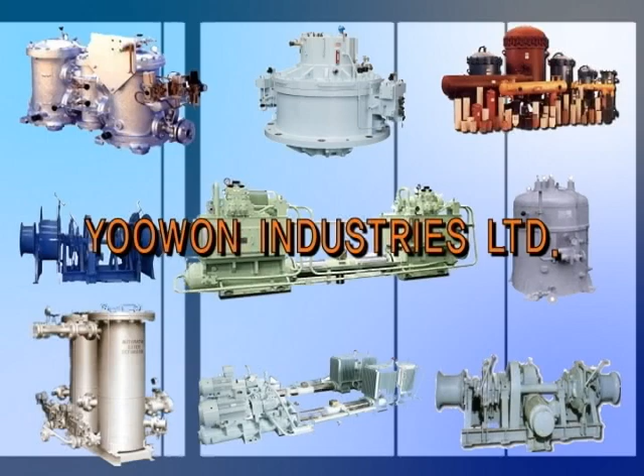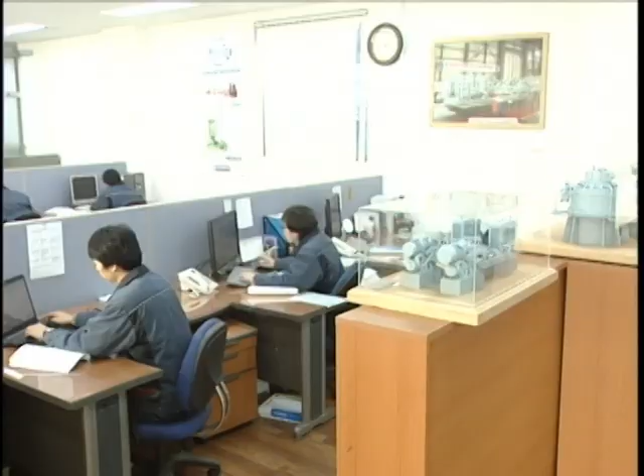Founded in February 1977 as a hydraulic steering gear and hydraulics machineries manufacturer, Yoowon was designated as a qualified company by the Korean Ministry of National Defense in 1983, being indebted to the endless passion of its employees.

Since entering into a technical license agreement with Hyde Marine Incorporated of the United States in 1985 for manufacturing IAC naval steering gears and deck equipment, Yoowon has supplied parts for numerous vessels for the Korean Navy and Coast Guard, and has also exported its products overseas.

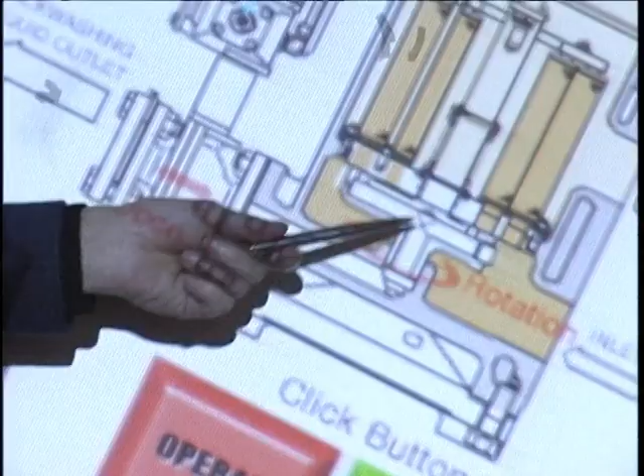Yoowon became the leader of Korea's shipbuilding equipment industry in 1993 based on its continuous growth efforts, and entered into a technical license agreement with Mitsubishi Heavy Industries Limited for the production of large electric hydraulic steering gears.

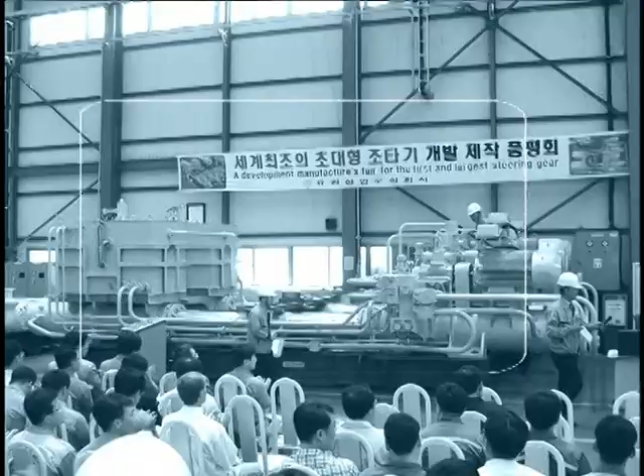In 1994, Yoowon began manufacturing automatic backwash oil filters for diesel engines and turbines. In 2001, it began production of the world's first large steering gears with maximum torque of 1,021 ton-meter. Four ship sets of steering gear were shipped in the same year after being presented to ship owners and shipbuilding companies.

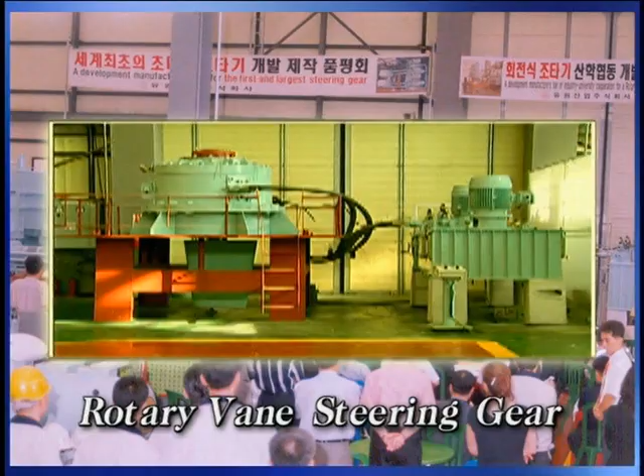Following the development of ultra-large steering gears, Yoowon captured the industrial spotlight by developing Korea's first rotary vane steering gears for small and medium-sized ships using its own technology.

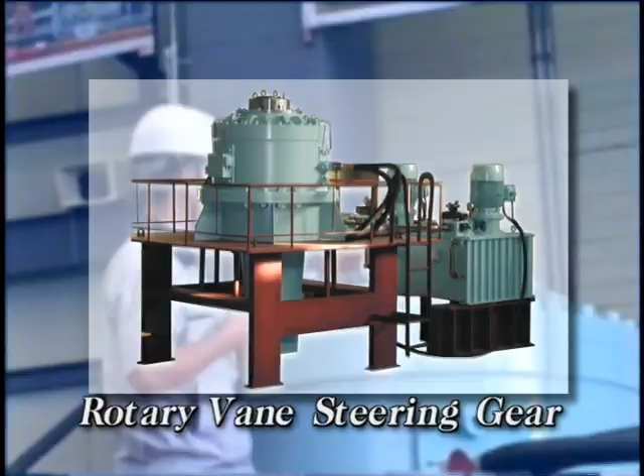In 2003, Yoowon steering gears were designated as a world-class product by the Ministry of Commerce, Industry and Energy. Yoowon was awarded this honor again in 2010 for its auto filters.

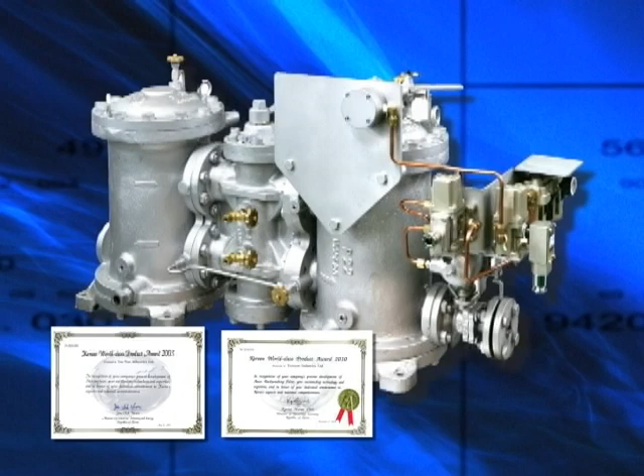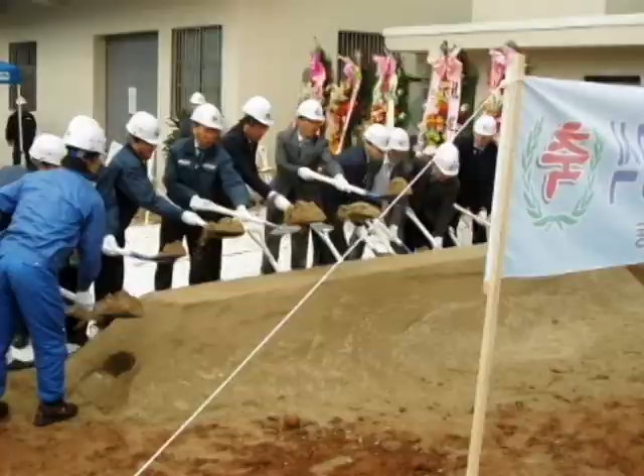In 2010, Yoowon completed its third manufacturing plant to meet its customers' needs and to achieve its vision for the future.

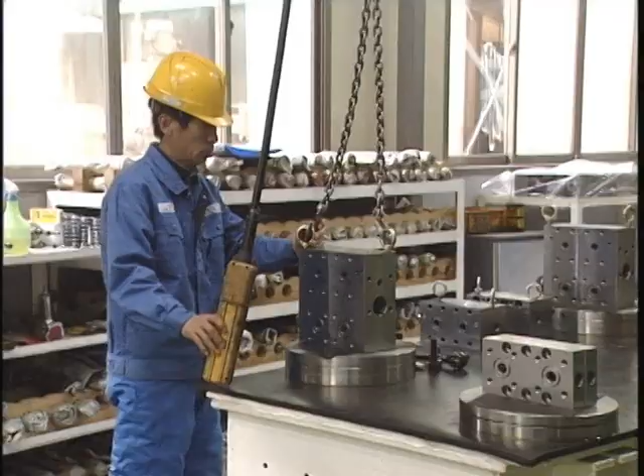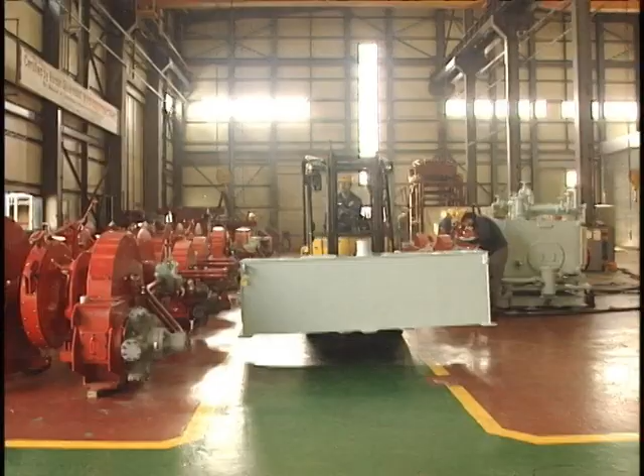Today, Yoowon is ready to make technological advancements with dedicated craftsmanship in collaboration with its business partners in an effort to manufacture world-leading products, as it leads the development of new technologies and manufactures the highest quality products for customer satisfaction.

Under a firm belief that the efficient management of our environment is the key to greater competitive strength and the improvement of our quality of life, Yoowon is making dedicated efforts to be an eco-friendly company.

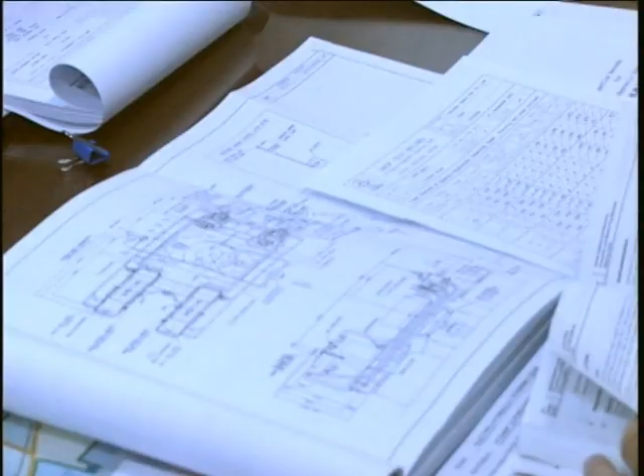Yoowon values principles, adheres to the fundamentals, and always leads changes with its creativity and spirit of challenge. Yoowon Industries is growing into a global leader of the shipbuilding equipment industry with its advanced technologies, and will rise to greater heights as a company that drives Korea's key industries.

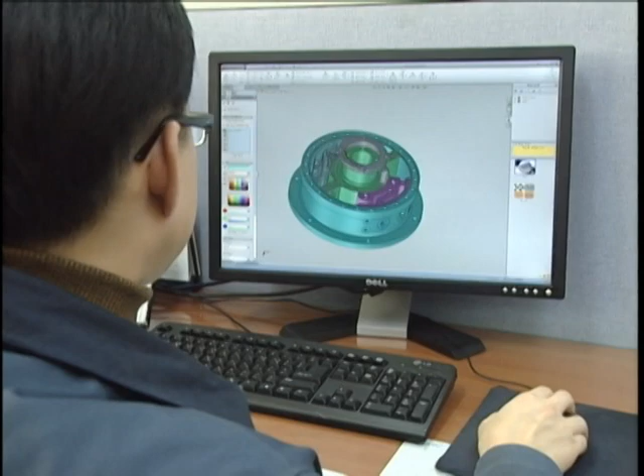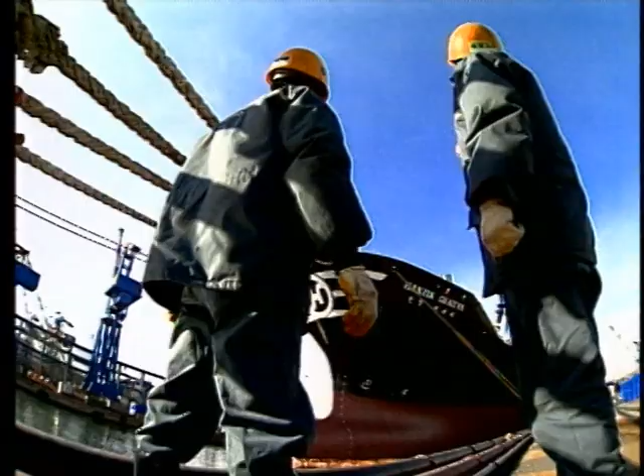Based on the technology and engineering experience accumulated over its 30-year history, Yoowon has been supplying high-quality steering gears, filters, and various deck equipment to Korea's major shipyards, including Hyundai Heavy Industries, Daewoo Shipbuilding and Marine Engineering, Samsung Heavy Industries, Hyundai Samho Heavy Industries, and Hanjin Heavy Industries, as well as Korea's small shipyards and rapidly growing overseas markets such as China.

Since developing steering gears and deck equipment for Korean Navy and Coast Guard vessels in 1997, Yoowon has been continuing its efforts to develop world-leading technologies.

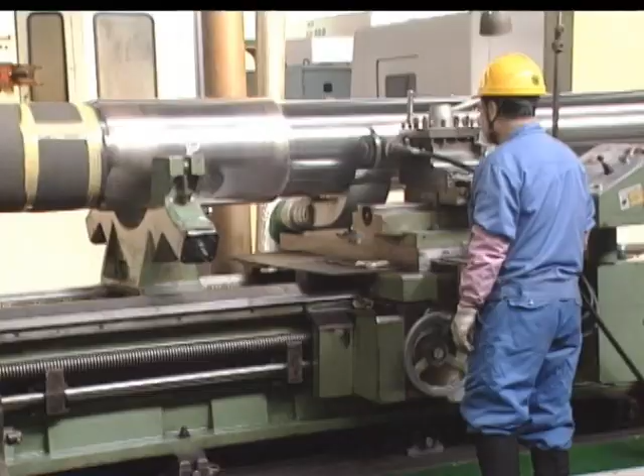Since entering into a technical license agreement with Mitsubishi Heavy Industries for the production of Rapson slide steering gears in 1993, it has been supplying its products for container carriers, oil tankers, bulk carriers, LNG carriers, and other vessels built in major shipyards in Korea and overseas.

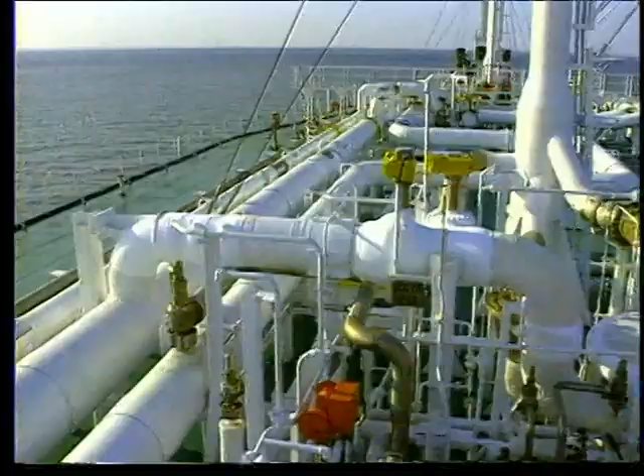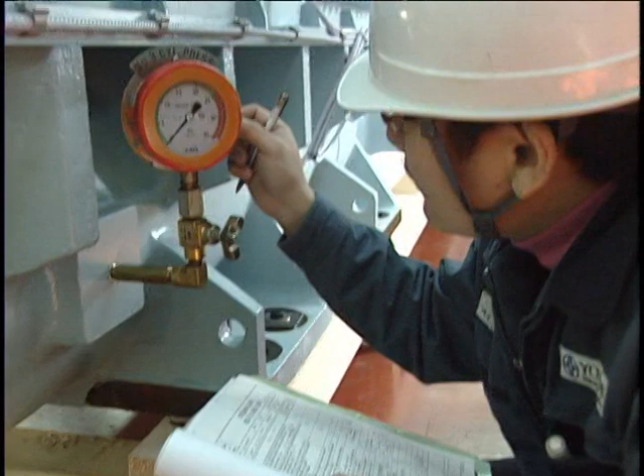Yoowon was successful in maintaining the cleanliness of hydraulic oil in LNG carrier steering gears under NAS Grade 7 in an assembled state using an eco-friendly, semi-permanent system. In 2007 alone, it supplied steering gears for 260,000 CBM LNG carriers.

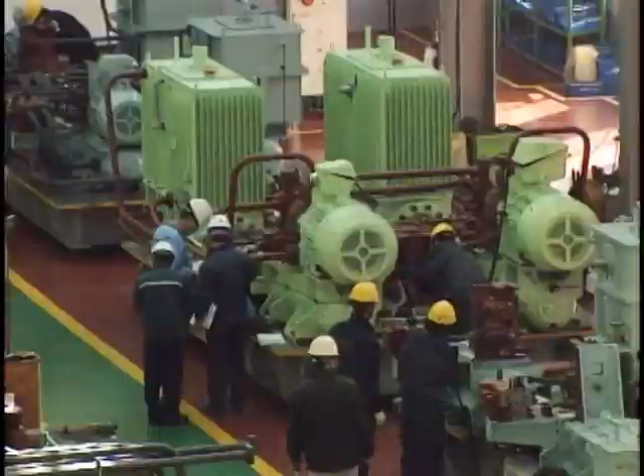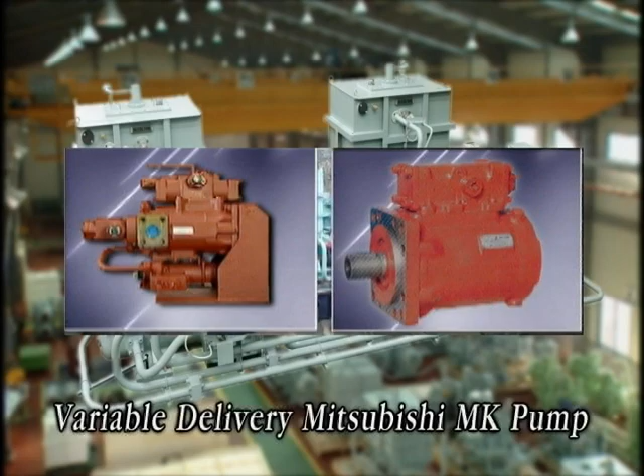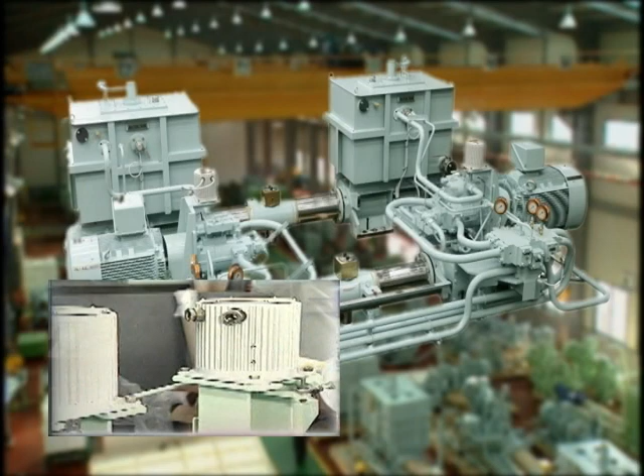The Rapson Slide steering gears utilize Mitsubishi's variable volume displacement MK pump, controlled by a torque motor linked to the servo controller, and oilless bearings for the ram pin bush so that no lubrication is necessary. It is equipped with a double hydraulic system with torque motor fail warning function against hydraulic locking, and an additional 3 to 4 hydraulic pumps are installed to be switchable into double output mode.

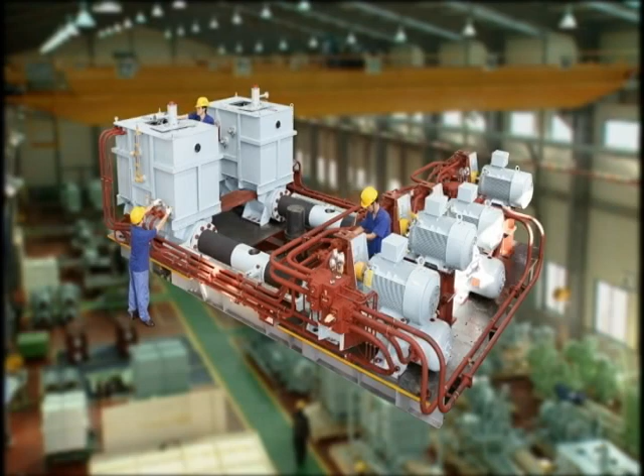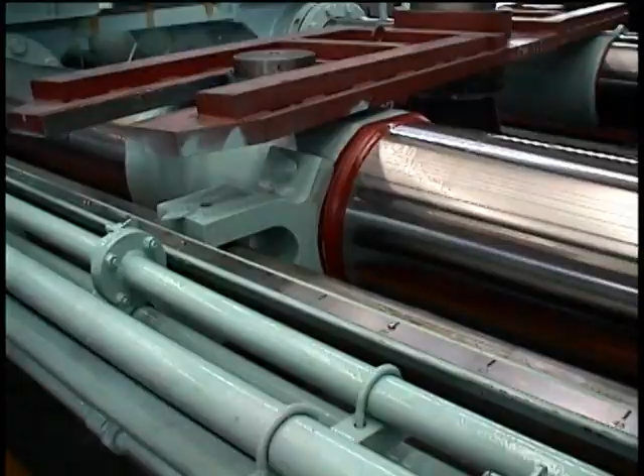The steering gears are manufactured to meet the specifications of every major classification society. Each product is tested in the shop in the presence of inspectors from major classification societies and ship owners, and only the approved products are delivered.

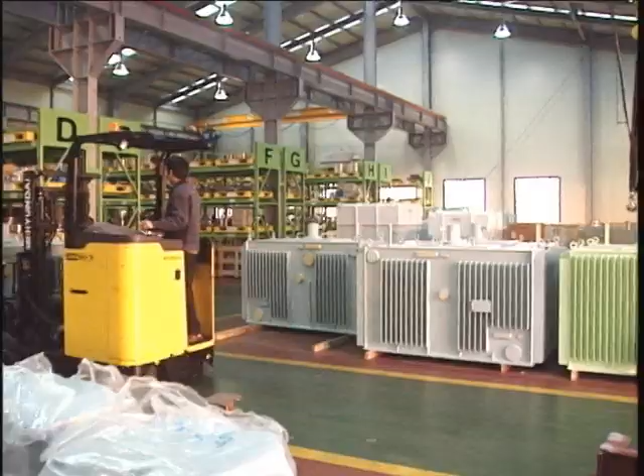Yoowon sales have grown steadily since the company made and entered into its first technical license agreement with MHI in 1993, and the total number of delivered products has exceeded 1,000 ship sets. By setting the record for the highest steering gear sales in 2009, Yoowon has proved itself as one of the world-leading steering gear manufacturers.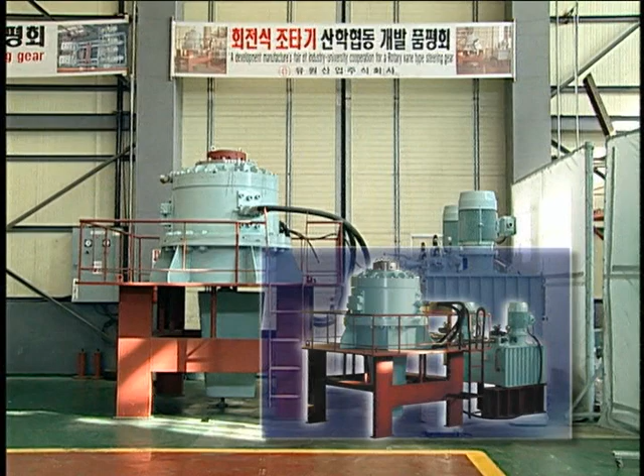Based on the technology acquired from developing piston type and Rapson slide steering gears, in 2002, Yoowon developed rotary vane steering gears using its own technologies. Yoowon rotary vane steering gears are preferred by small and medium-sized shipyards, and they received outstanding evaluations from ship owners and classification societies around the world.

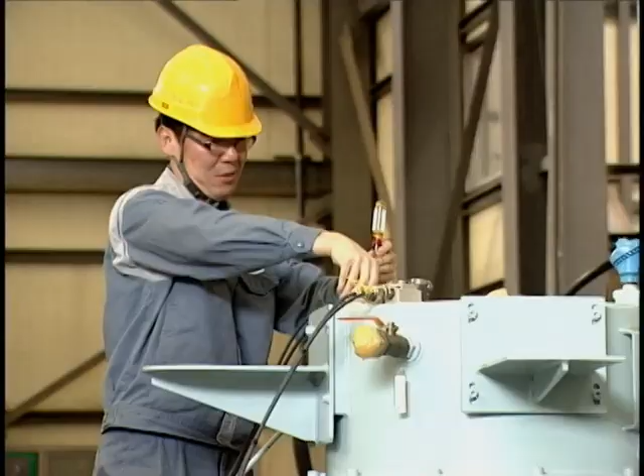The delivery of rotary vane steering gears to Korean shipyards began in 2006. Today, Yoowon has a record of delivery of hundreds of units to numerous shipyards in Korea and overseas.

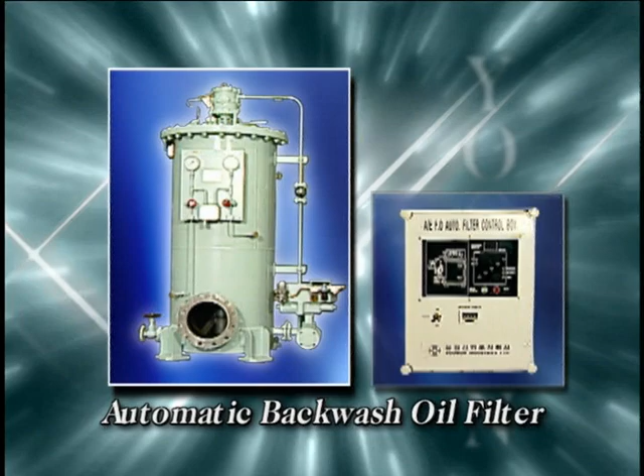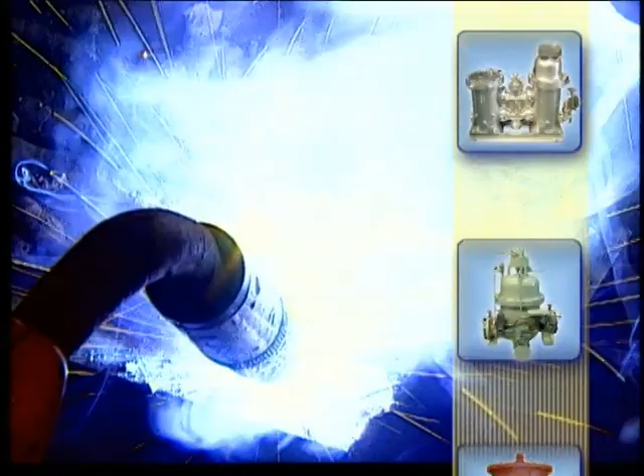Yoowon began production of automatic backwash oil filters and general multi-purpose filters in 1984 to filter fuel and lubrication oil for the engine and turbine. Ranging from shipyards in Korea and overseas to onshore power plants, Yoowon is supplying high-quality semi-permanent filters to be used by engine makers and nuclear power plants.

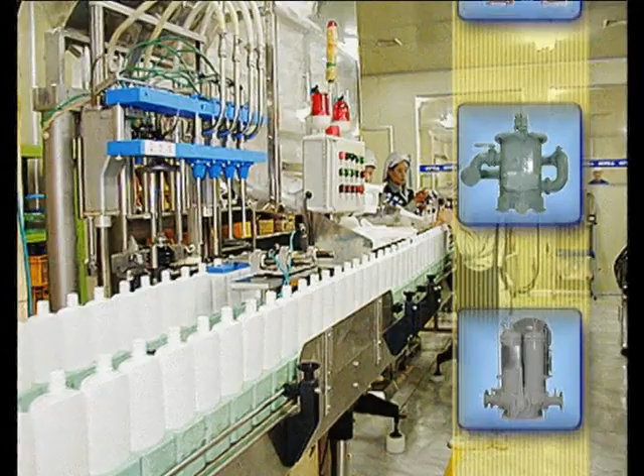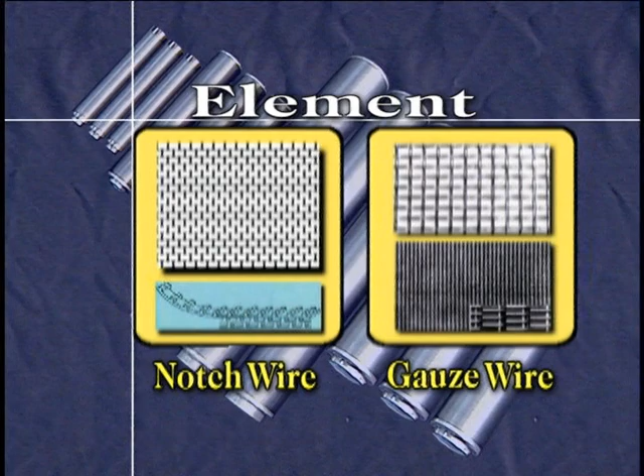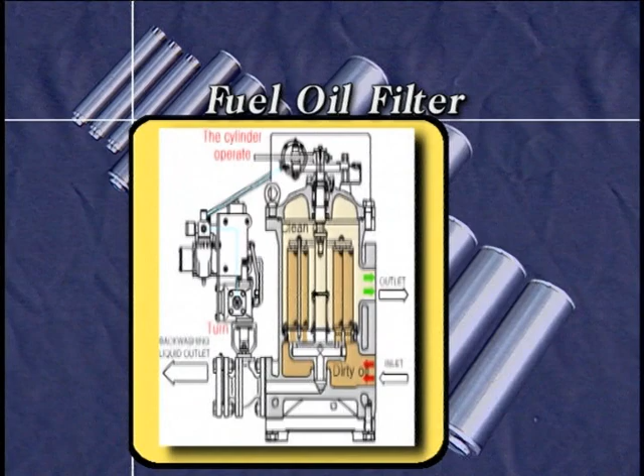These filters can be produced to have a filtration efficiency up to 10 microns while maintaining a greater durability compared to gauze wire elements. The filters also have controls with timer settings for automatic backwashing and utilize a system that automatically cleans impurities such as sludge on the element surface using the hydraulic pressure difference within the filter. This means that filters can have semi-permanent lifespans with regular maintenance.

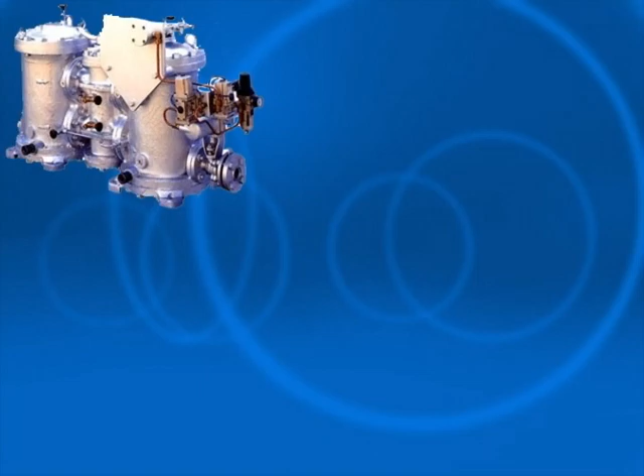The filters separate water and solid impurities in oil, diesel, gasoline, liquid natural gas, and jet fuel. Yoowon filters are supplied to oil refineries, oil tanks, machinery loading equipment, and jet fueling facilities in airports and Air Force bases. Yoowon also signed a filter supply contract for Samsung Heavy Industries' ballast system in 2010.

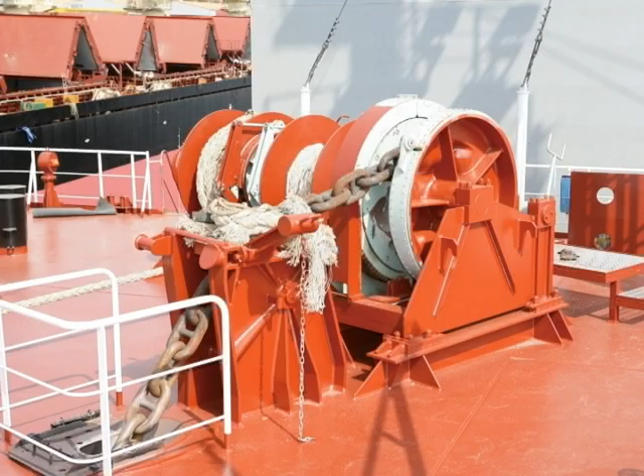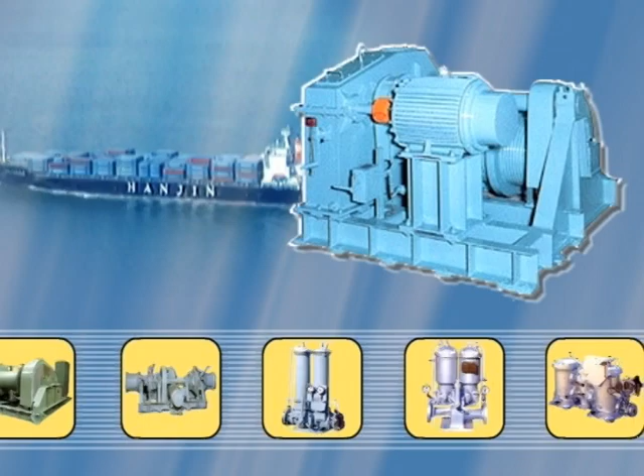As shipbuilding technology develops, Yoowon is working to improve ease of repair, user convenience, and economic efficiency of various equipment such as windlasses, mooring winches, capstans, towing winches, and special winches. And it is continuing its R&D to develop outstanding products such as offshore cranes, floating docks, and winches for nets and booms.

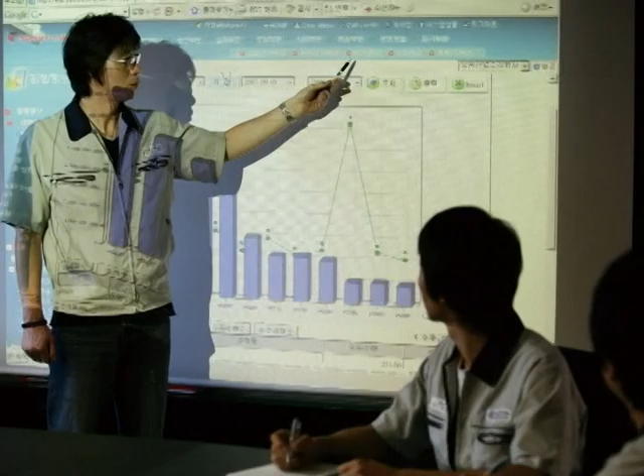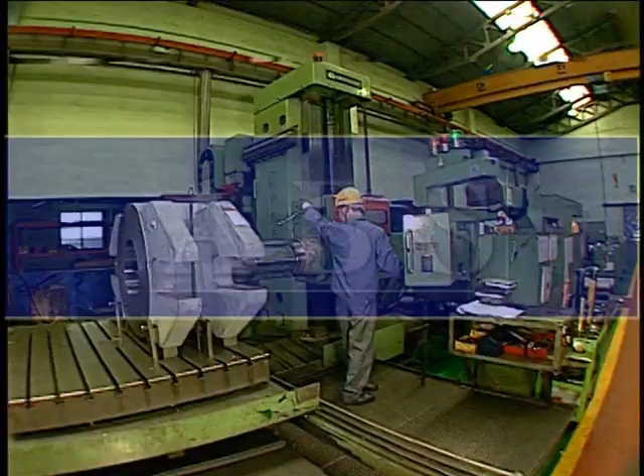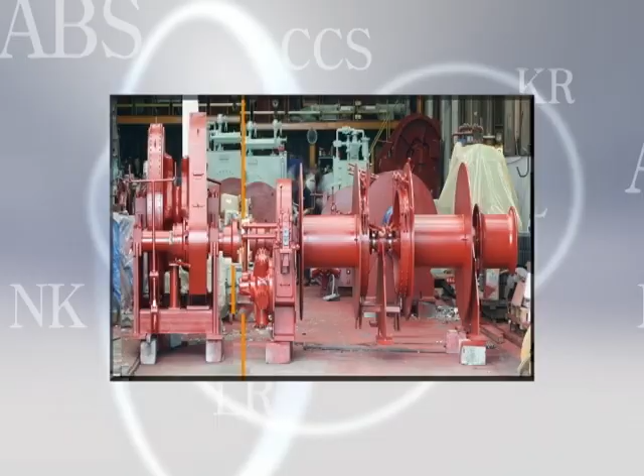Every Yoowon product is manufactured to meet specifications of every ship classification society, including ABS, DNV, LR, GL, BV, NK, CCS, and KR, plus other international regulations. Yoowon has outstanding engineers with abundant experience, ultra-high precision machinery, and advanced equipment. Yoowon is able to produce high-quality products and infinite development capabilities.

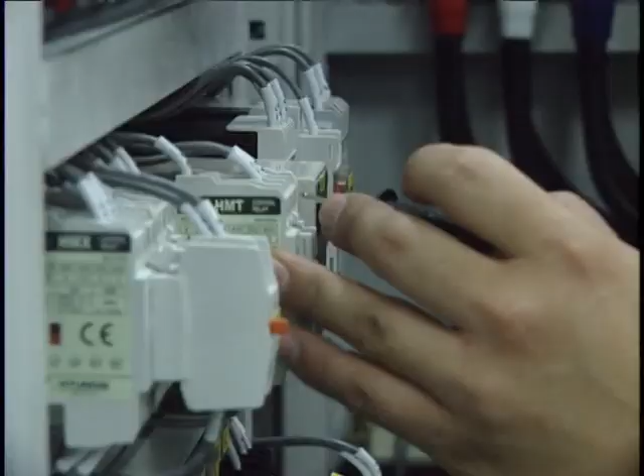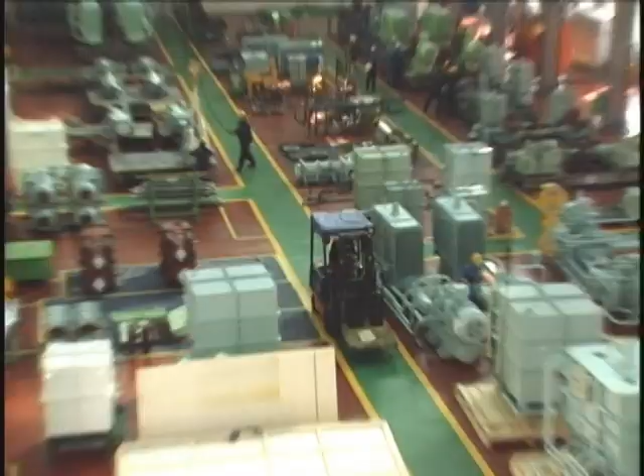Furthermore, Yoowon is developing the control units required for its products by using its own technologies, which is why Yoowon is recognized as a supplier of high-quality products built by using advanced technologies. Yoowon has acquired ISO 9001 and 14001 certificates from ABS, and it is operating a worldwide network of 20 offices in 16 countries to provide convenient after-sales service and information regarding all its products.

A company that creates a harmony of safety and growth. Yoowon Industries Limited. To earn its customers' trust by putting customer satisfaction first in the time of infinite competition, Yoowon will focus its efforts to become a true elite company of the 21st century.

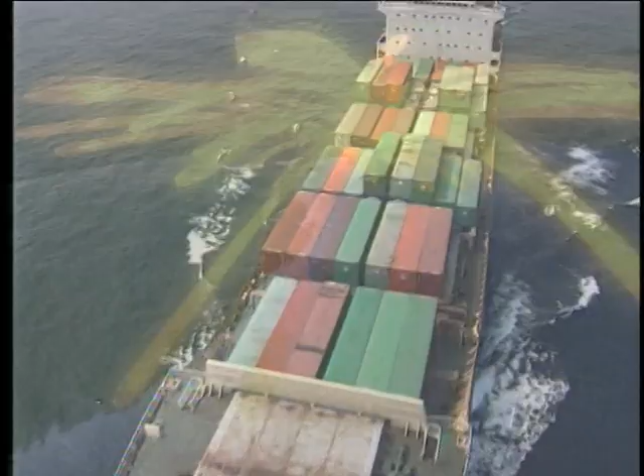A company that stands by the world. Yoowon Industries Limited. With pride in being the leading supplier of shipbuilding equipment, Yoowon will continue its dedication to support the shipbuilding industry of the world. Thank you.